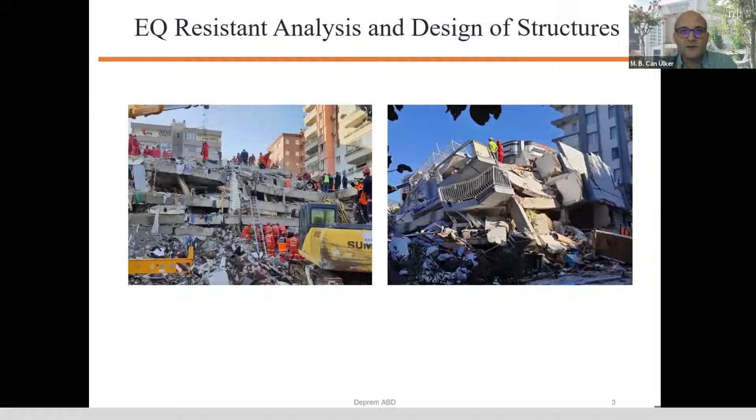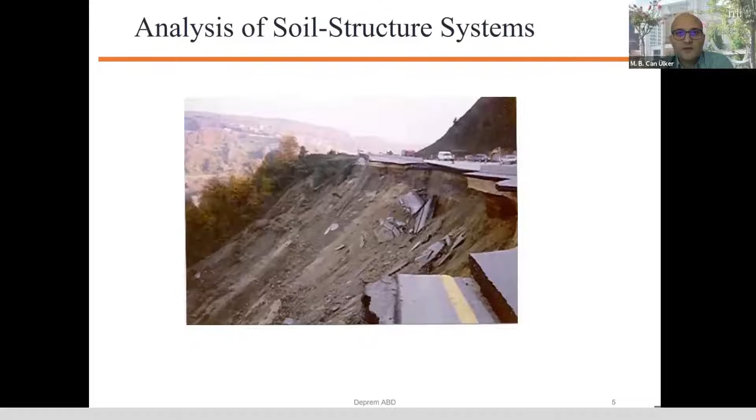Earthquake Engineering program is essentially a graduate program within the Disaster Management Institute, which is directly related with the Civil Engineering Department. Earthquake Engineering examines the behavior of structural systems built in and on soil layers under earthquake excitations. Theoretical, numerical, and experimental studies are carried out within the program.

In the Earthquake Engineering Master's program, we have 10 mandatory and 15 elective courses. Most of these courses are DEP 500 coded. The other courses are YAP coded, and there's also a ZMG coded course.

There are many faculty members working on different subjects in the Department of Earthquake Engineering. While these instructors are mainly in the Institute of Disaster Management as permanent staff, some of our faculty within the Department of Civil Engineering and Architecture are also affiliated with Earthquake Engineering.

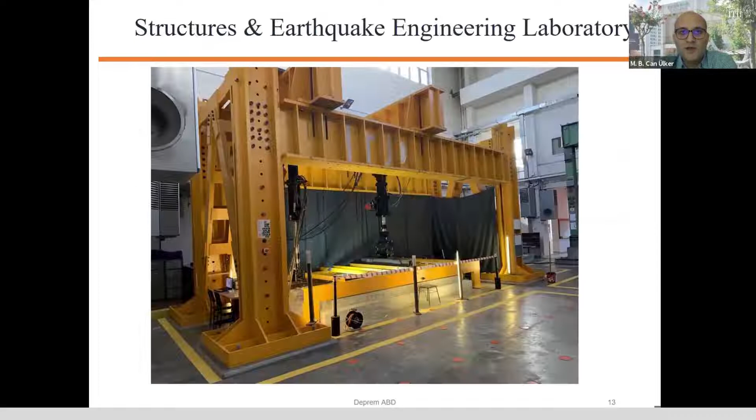There are 3 laboratories associated with Earthquake Engineering. In the Structures and Earthquake Engineering Lab, behaviors of various vertical and horizontal structural elements, as well as structural systems under static and dynamic loads, are studied experimentally.

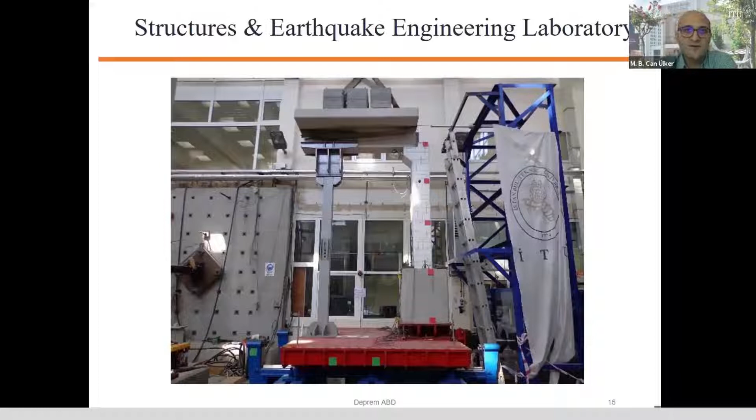The other research laboratory is the Earthquake Engineering R&D Lab. In this laboratory, which is funded by a TÜBİTAK project in 2017, we mainly determine the hydromechanical behavior of soils under static and dynamic loads.

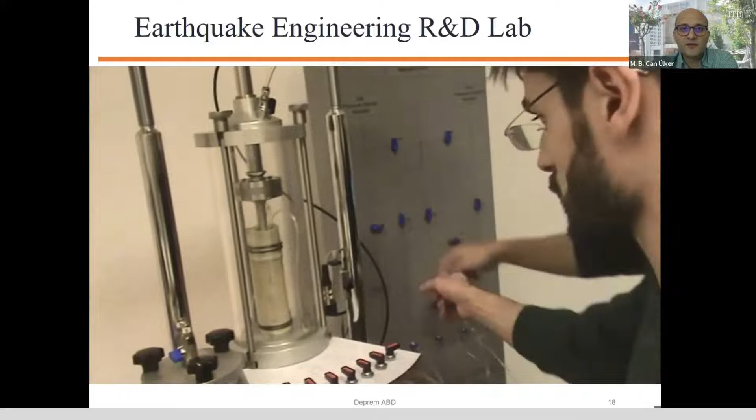The third laboratory, located also in the Disaster Management Institute, is called the Structural Health Monitoring Lab.

In earthquake engineering, various studies are carried out on many research topics related to soil structure systems. As I mentioned earlier, while many of these studies are conducted experimentally, many of our faculty members also work on theoretical development and numerical modeling of such systems.

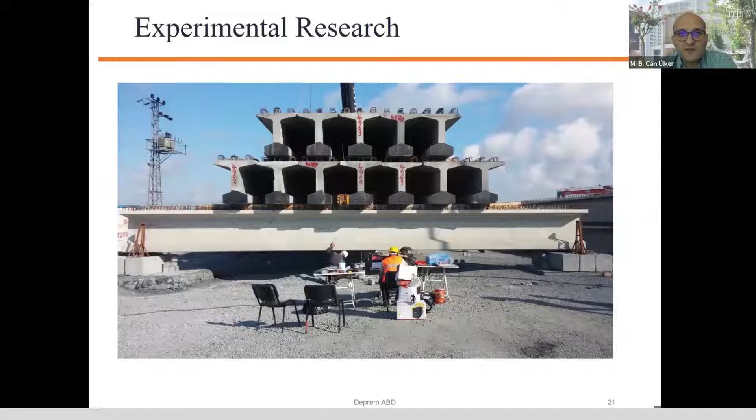We focus mainly on numerical and experimental studies on earthquake-resistant design of building systems. In addition, earthquake hazard assessment as well as risk and vulnerability analyses are among the most important research studies we perform.

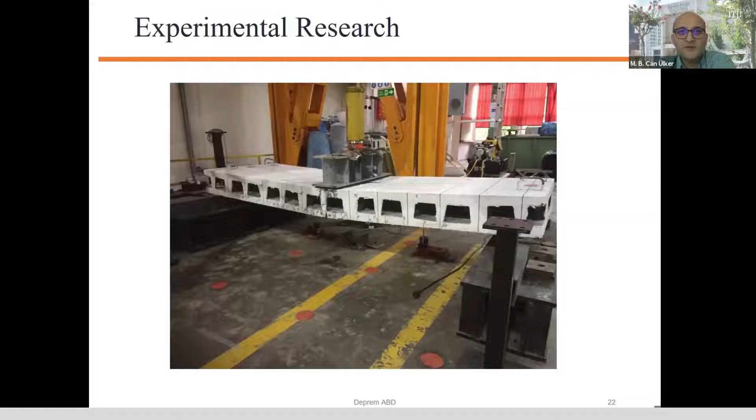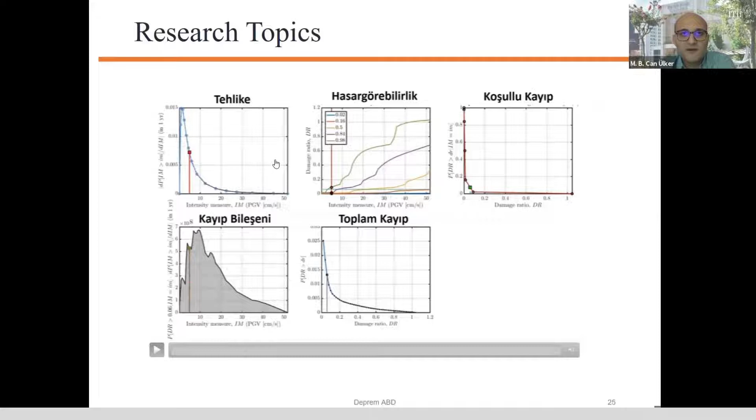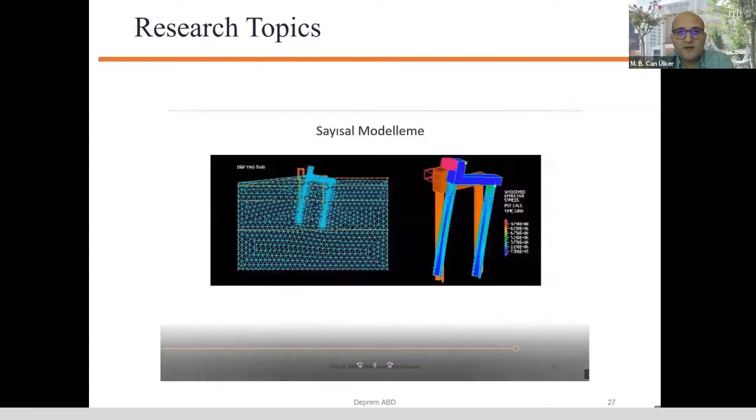In addition, theoretical studies on constitutive behavior of soils at elemental scale, as well as site-specific dynamic response analyses and soil structure interaction problems at macro scale, are at the forefront of such modeling studies. We also use advanced machine learning methods and their algorithms for understanding soil failure, such as liquefaction.

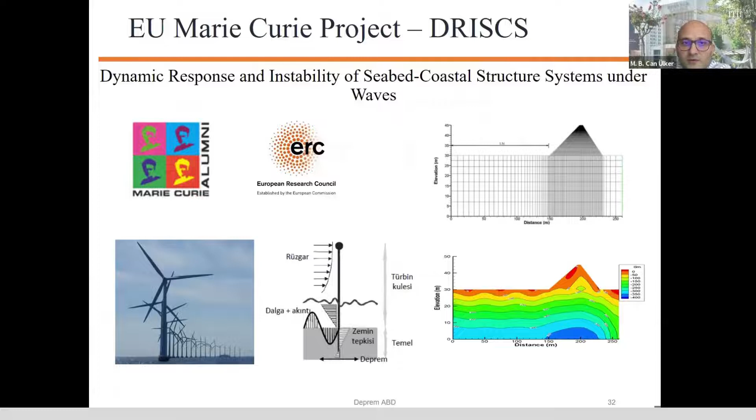I would like to emphasize here one thing: our research interests of faculty in the Earthquake Engineering Department, particularly in the Earthquake Engineering Institute, are mainly funded by external sources, including the European Union, through Marie Curie and other projects, and the National Scientific and Technological Research Council called TÜBİTAK,

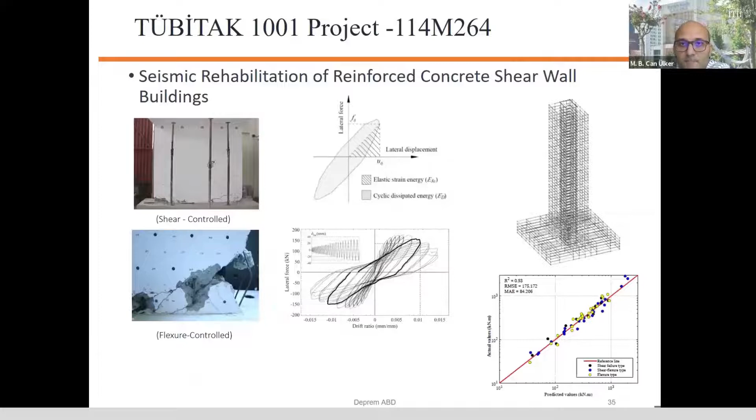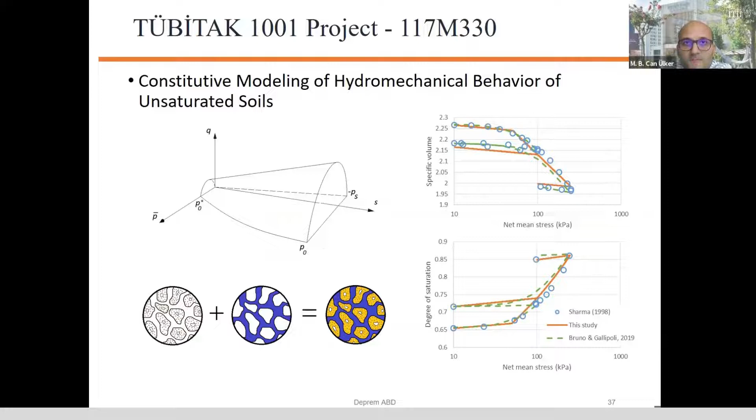and also some other state or private funded resources, such as ISKI or municipalities of Istanbul and nearby cities such as Bursa, and including ITU administration. So many of our research interests, again, are funded by external sources.

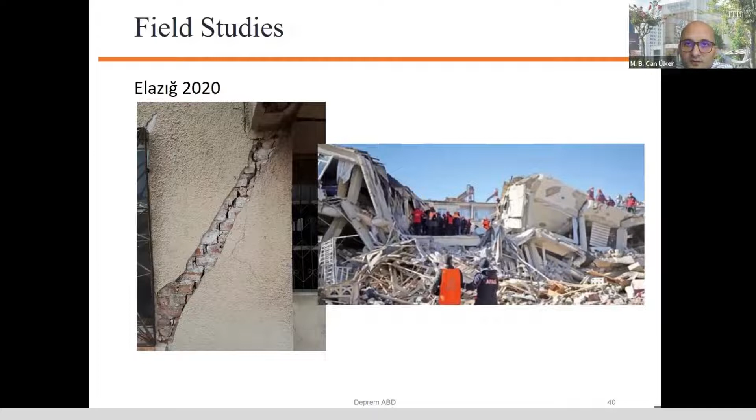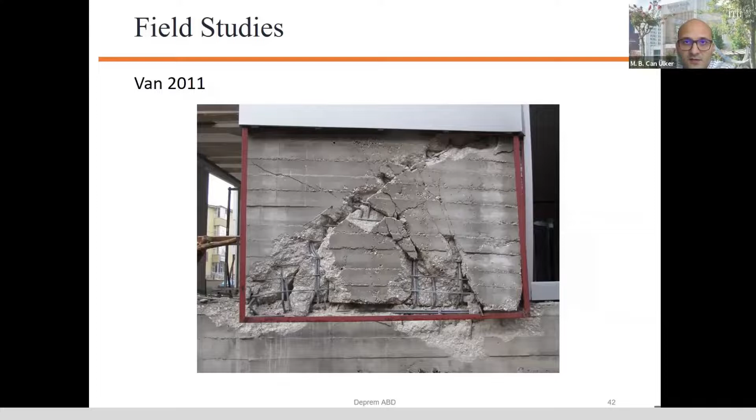Before I finish this introductory presentation, I need to mention that field trips following major earthquakes that hit residential areas are very common in earthquake engineering. Our faculty visit these damaged areas where they investigate the damaged buildings and write technical reports and papers as a result. The recent earthquakes in the city of Van and the cities of Elazığ and Izmir are such examples.

I would like to conclude my presentation by inviting all of you to pursue Master's and PhD studies in earthquake engineering, which is a very important topic for Turkey and for the globe, offering many career opportunities for young generations. Thank you very much for your attention.